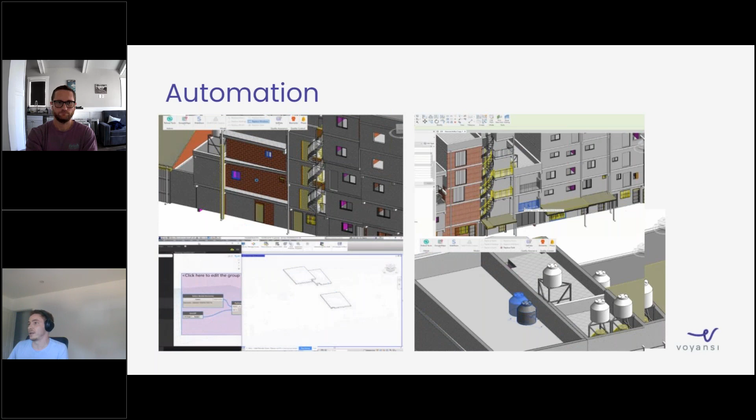So once we had all this, we knew we could scale it up and continue building on top of an already reliable model and a set of automations that ensured quality in the data and the work we were doing. So we started identifying the need for integrations.

Integrations make different platforms talk to each other. This was a case where we needed more than one platform to work. We had common data points, and they were open to scripting. So we validated these questions, and we were able to leverage integrations in this project.

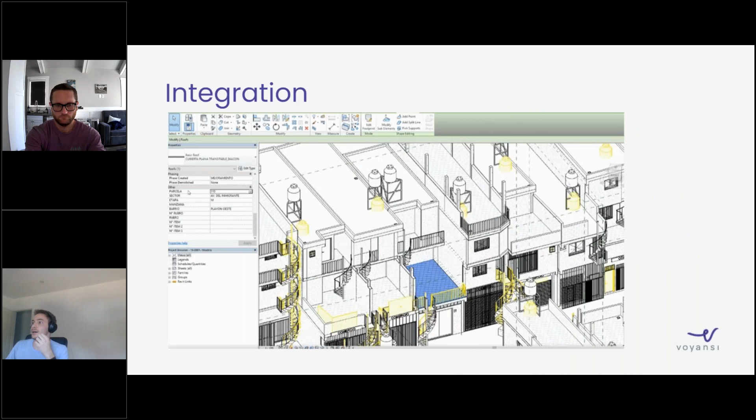In the next slide, we have an example of that. We started using Dynamo to make quantity takeoffs. That's an old GIF, but the script grew to be like 10 times as much as that. It could scale up as the project moved, and we found out other needs. We could continue to work on it and add more features and more intelligence to all of that.

So here, for the final part of this project, we identified we could scale again all that to a platform and make a kind of case study around that. We also have an example on the next one.

We started putting ourselves in the place of, for example, a contractor that wanted to bid for a portion of this master plan, and would be interested in having an interactive platform filtered with information useful to my business, and also putting these 3D models, 3D BIM models and data available through a web browser, so that I wouldn't need to use any specific or complex software to do it.

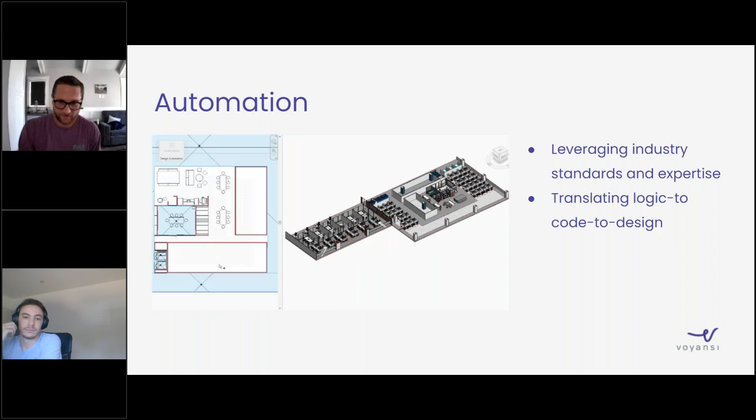What we like to say is, it'd be difficult to sit down with someone like Frank Gehry and immediately understand all of his design logic. But if he had it all in a JSON file, it would be extremely easy to understand. There's a really interesting process that happens when you start to codify your standards. You look at them with more rigor and analyze them with a finer lens, because it will scale. If you have a problem in your standards, don't release that tool, because now you're going to have 100 problems with your standards. So there's this balance of risk versus reward that we're always aware of.

And with Delos, another advantage of harvesting the model and making it easy to do so is the ability to achieve design snapshots.

We're able to compare harvests against each other, understand how much of the floor plan is being utilized for one particular thing, and really get a sense of how the space was both designed over time and also how it functions over time. Delos is kind of a work in progress.

It's a tool we touch from time to time, and we're really excited to continue evolving this and offering it hopefully as a product down the road for other companies to use.

As I mentioned, we're not just building tools for architects and designers. This part of Delos actually allows anyone to access 3D model data, spin around the floor plan, and get a sense of the type of work that's actually happening in the model.

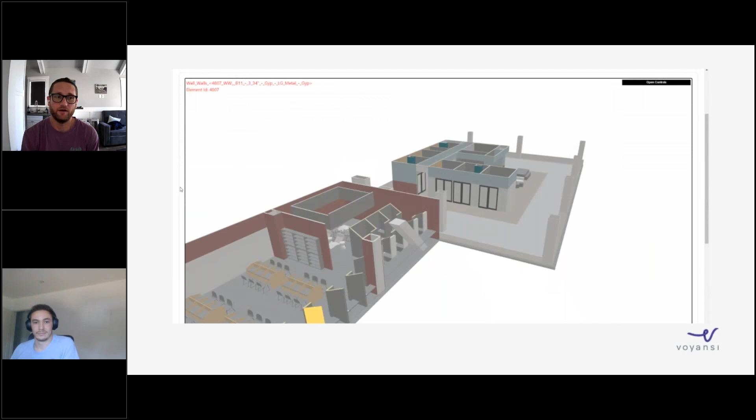We like to also link up this workflow to other integrations downstream. So if there's an Excel report or something that you have to mimic, that type of deliverable would be exportable from this type of platform. But when possible, we try to keep everything live and on the web and interactive, so that downloading and exporting doesn't have to take place.

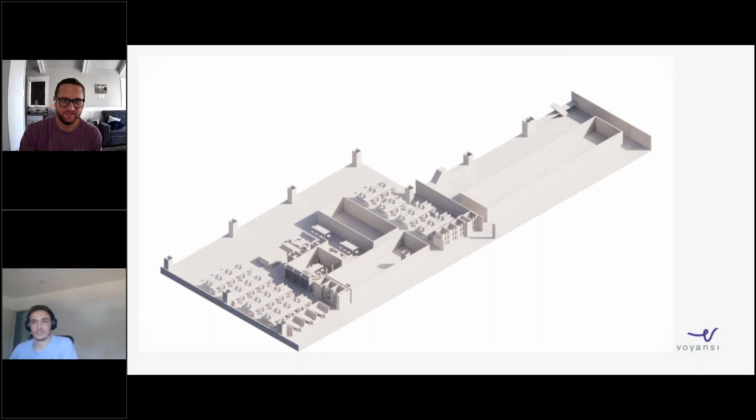This is a sort of animated rendering that we were able to produce from these serialized harvests. And we like to show this slide because it's not just about the interactive web apps, right? It can be as elegant as a rendering that changes over time to deliver building information.

Again, we come from an architectural background, so I think Fran and I especially have this soft spot for allowing code to be beautiful and actually make artwork that we're used to in the industry. And that's a big thing that we like to focus on.

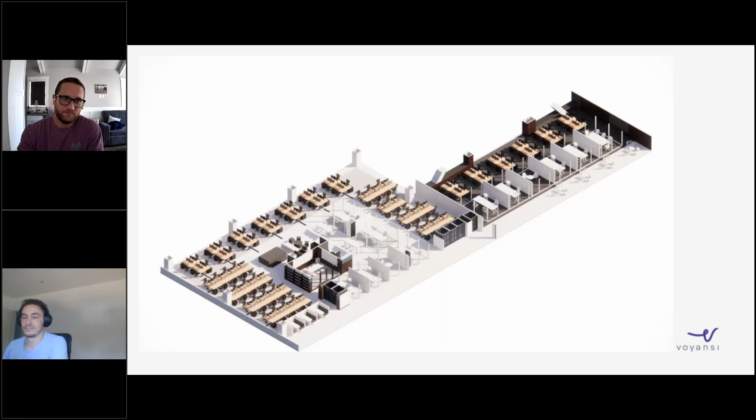I will pass it over to Fran to talk about SHIP.

Yeah, so this is a very interesting product that we've been building. It's one of our latest projects. So it's basically a marketplace where design meets software.

So here we started with a problem that we've always faced, that we waste dozens of hours a month shipping software to clients and maintaining it and updating everything.

So basically the traditional process that we usually use is that we compile our code—this is me talking as a developer—we compile code and we basically make that into an installer that the clients can use, and we literally email it somehow to them.

We then make updates and fix errors and constantly have to rework and resend all this, so it's not very practical.

So we were looking for a solution but we couldn't find it, so we built one.